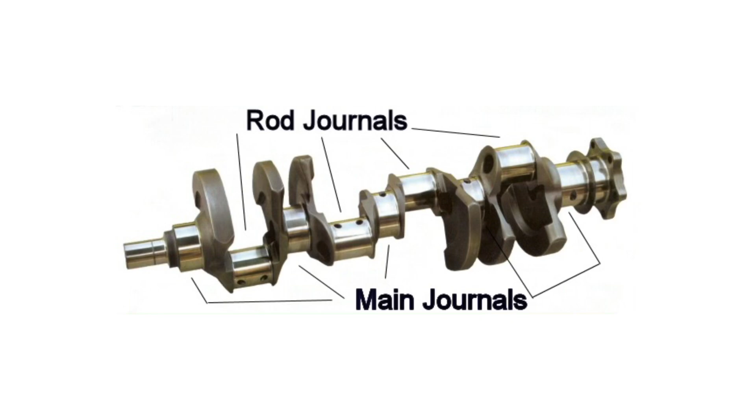The crankshaft journal is also called the crankpin or rod bearing journal. It is a mechanical device inside the engine which connects the crankshaft to the connecting rods for each cylinder. To look at it a different way, the crankshaft is the name given to the whole shaft, and the rod bearing journal is the point where the connecting rod connects to the crankshaft.

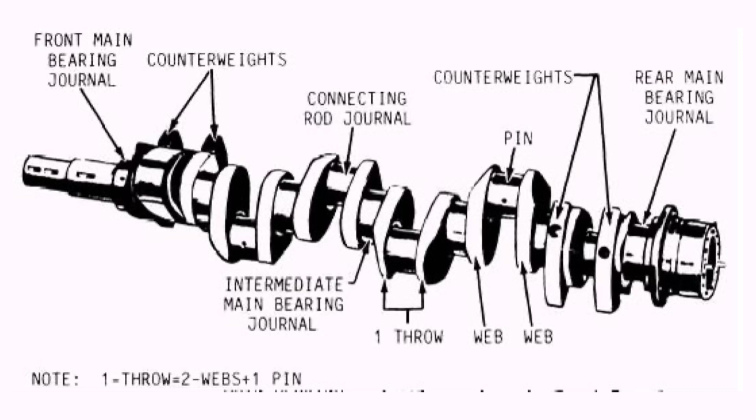In this episode, we are only covering the large journal engines and the 389 SD. All of the small and mid-range journals are covered in a separate video, which came out yesterday, which I'll link right here, and I'll also put the link in the description.

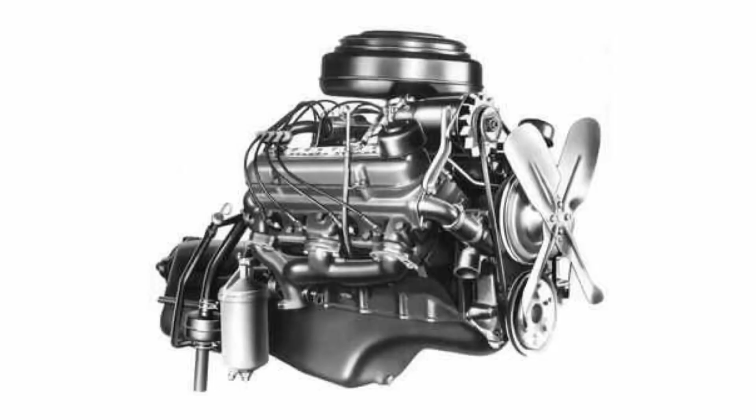As a little bit of a refresher, Pontiac's V8 was ready by 1953, but Buick and Chevrolet would complain to the corporate heads of General Motors to let Buick offer theirs first and put a 2-year hold on Pontiac so Chevy had enough time to develop a V8 of their very own.

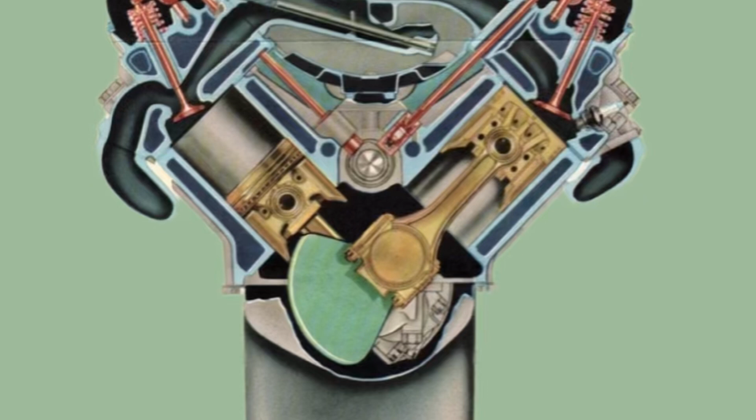The Pontiac V8 was a stout block design, to say the least, and it didn't follow the big block, small block mold that a lot of General Motors engines did. There was only one block size that went from 265 all the way up to 455 cubic inch displacement.

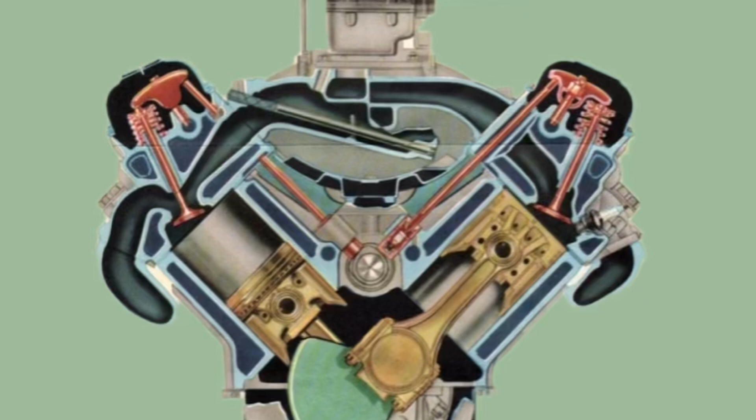Overhead valve arrangement features rocker arms on ball pivots on studs set inside the cylinder head instead of using a separate rocker shaft. The cam inside the engine would actuate a lifter, most of them hydraulic, but there were some mechanical lifters used in this engine series, which would actuate the push rod. Valves would open and close on the pivot action of the rocker arms.

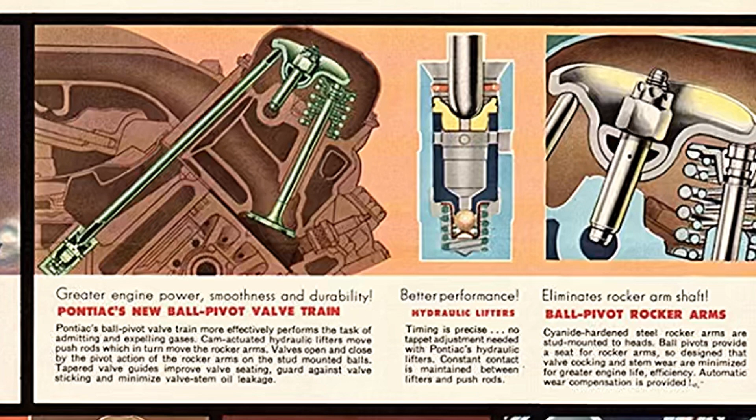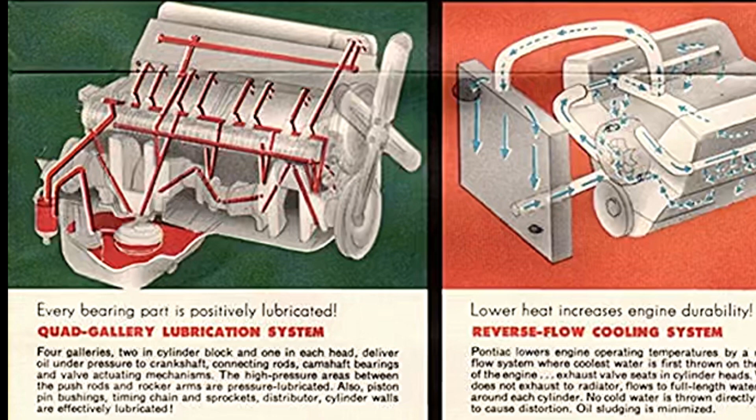This engine series uses a full pressurized oil and lubrication system, shooting a steady stream of oil to all of the critical components inside the engine from 4 oil galleries, 2 inside the cylinder block and 1 in each of the cylinder heads. Super Duty was Pontiac's super high performance engine program, and we have to talk about a character in history that goes by the name of Henry Yunick, but best known as Smokey Yunick.

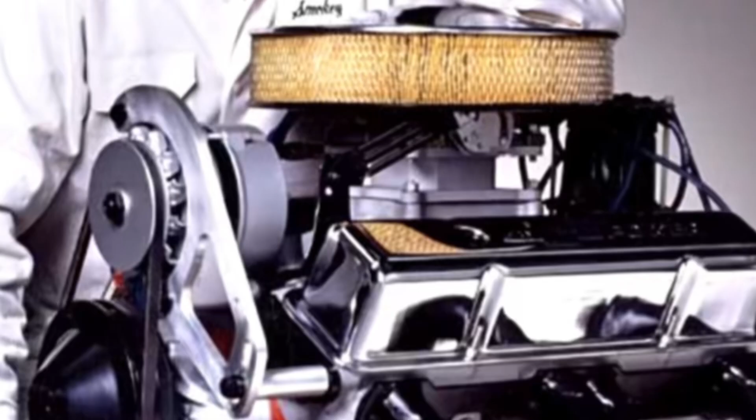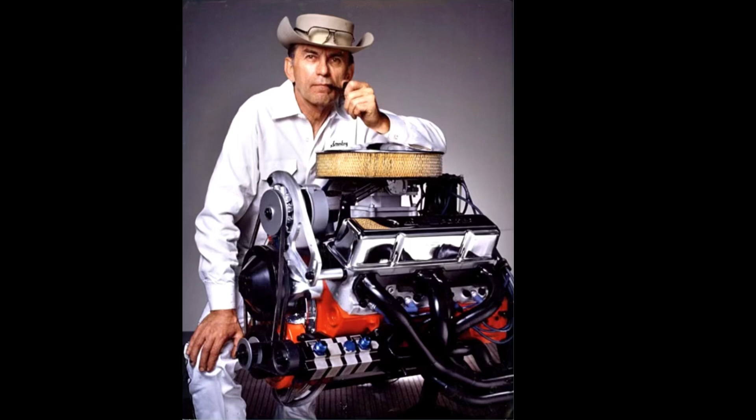In life, you meet people and you meet characters. Smokey was a character. His trademark look was the white uniform with the battered cowboy hat with a cigar or corncob pipe. He got his start in NASCAR, which was the National Association for Stock Car Auto Racing.

Yunick would get in with a local stock car racing team owner, Marshall Teague. Yes, that Marshall Teague. Yunick was a good mechanic, but he didn't have any experience with stock car racing until joining Teague's team. Yunick would tune the Hudson Hornet, which is what Marshall Teague raced, using a 308 cubic inch displacement flathead 6. The race engines were called the 7X, and they sound nothing like any other 6-cylinder you've ever heard before.

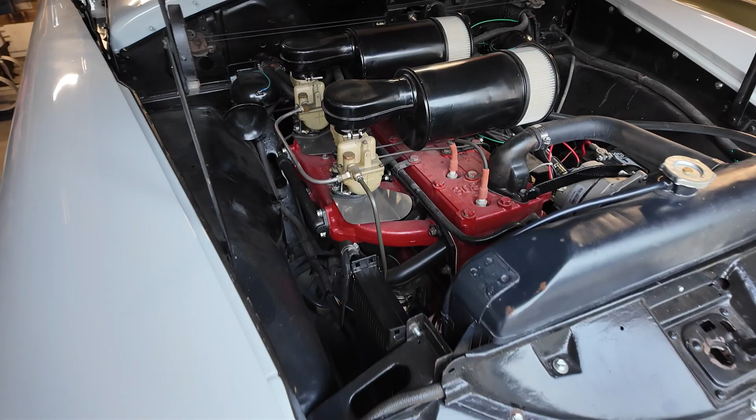Take a listen to this one. Anyway, with Yunick's help, they were able to win the Southern 500.

From the years of 1958 through 1973, Yunick would be involved with the Indianapolis 500. Yunick would evolve into one of the best car engine and car innovators, as well as interpreter of the rules in the sport of NASCAR.

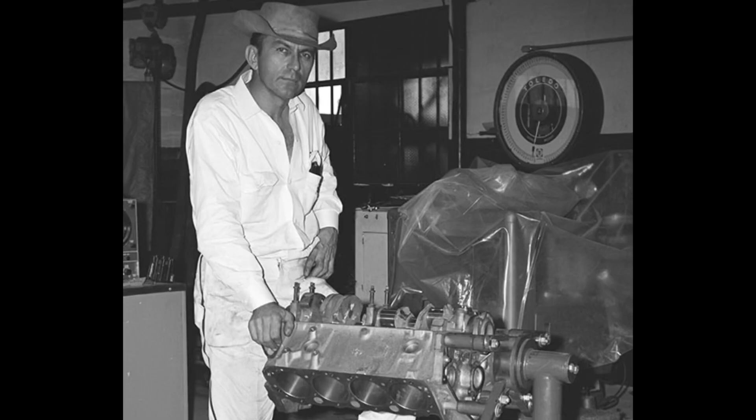Yunick would work with many different automotive brands during his time in NASCAR: Hudson, Chevy, Ford. Yunick would join Pontiac's racing division in 1959, and he was the force behind the Pontiac Super Duty engine program.

The SD engines had upgraded internals to go racing with, whether that was on the drag strip or making a left-hand turn on the oval track. These were the cream of the crop, chef's kiss, that Pontiac offered. SD versions came in 389, 421, and 455.

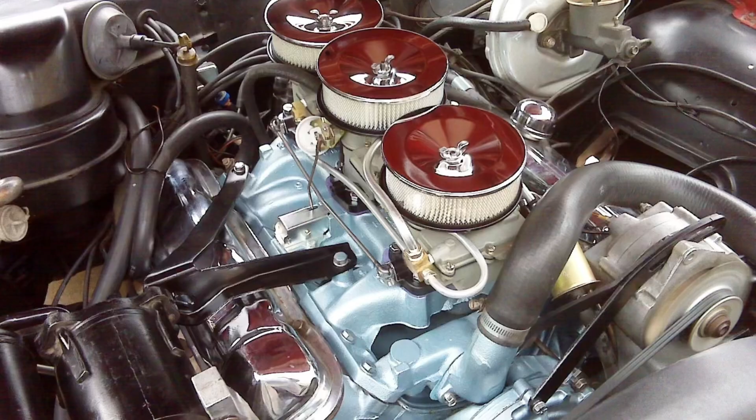The 389 got a Super Duty package in 1960, and it was offered until 1962. It got internal upgrades such as, but not limited to, 4-bolt main bearing caps, forged steel crankshaft, and forged connecting rods. There was another 389 engine option known as the 420A, Tempest 389, offered from 1959 through 1962, which produced up to 348 horsepower with 3 two-barrel carburetors, better known as tri-power.

The Super Duty version of the 421 was available as a secret menu option on the full-size Pontiacs from late 1961 through 63. Sources conflict on when the standard 421 was available, either in 63 or 64, but both the Super Duty version and the standard version were offered until 1966.

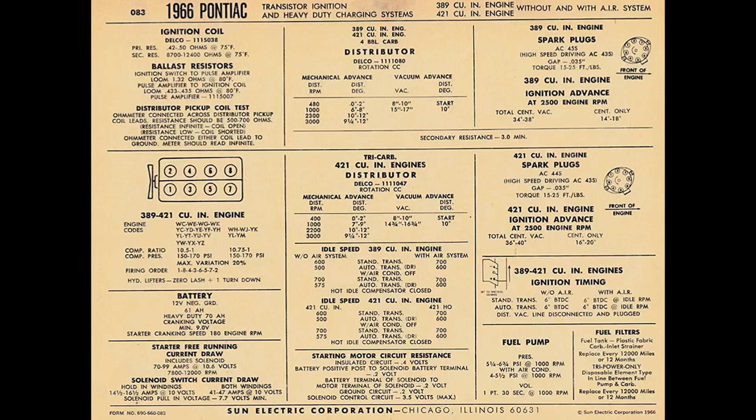The 421 V8 was cast differently than all of the other previous blocks, using a thinner wall casting, making the engine lighter in the process. Water ports going from the head to the intake manifolds were slightly changed, so the 1961 and later manifolds will not work on earlier engines and vice versa.

So, what set the Super Duty apart from the standard 421 included but not limited to: the camshaft was a McKellar number 10 with 308/320 degrees of duration. They were using solid lifters. The standard 421 used hydraulic lifters. Forged steel connecting rods, forged aluminum Mickey Thompson pistons, forged steel crankshaft, high pressure heavy duty oil pump with larger 8-quart oil sump, as well as 4-bolt main bearing caps.

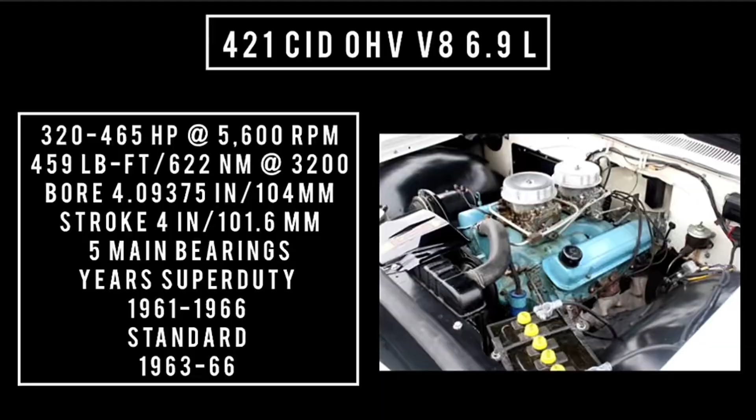421 cubic inch displacement overhead valve V8, 6.9 liters. The standard version made anywhere between 320 to 356 horsepower, around 4,800 RPM. But the Super Duty version could make anywhere between 353 all the way up to 405 horsepower, which some still say is even a conservative number.

Many believe that it can make up to 465 horsepower at 5,600 RPM, 459 pound-feet, or 622 Newton meters at 3,200 RPM, with a bore of 4.09375 inches and a stroke of 4 inches. Compression could be anywhere between 10.75 all the way up to 12. The standard engine was only available from 1963 through 1966, whereas the Super Duty was available from 61 through 66.

It's also important to note that there was an experimental Pontiac overhead cam 421 V8 made by McKellar, which will get its own episode one day.

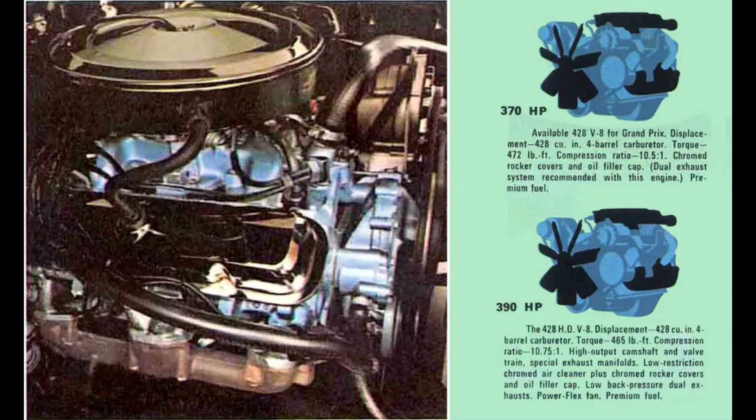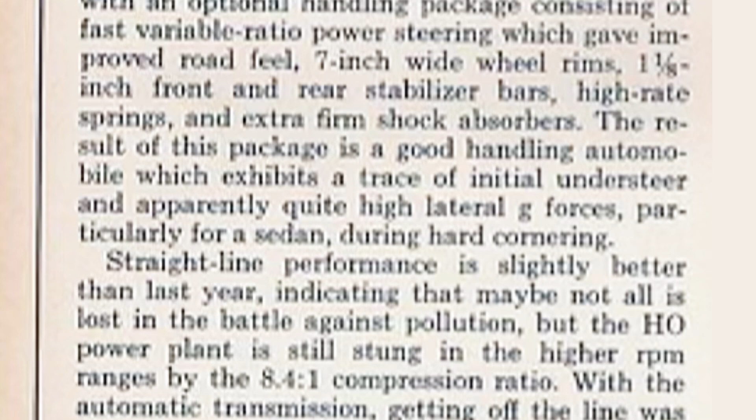In 1970, Pontiac would bore the 428 to 4.15 inches, and they would also increase the stroke to 4.21 inches, bringing overall displacement to 455 cubic inches, making this the largest displacement engine in Pontiac's V8 engine family. It was offered in standard, high output, and Super Duty. 455 cubic inch displacement overhead valve V8, 7.4 liters.

It's good for anywhere between 200 to 335 horsepower at 4,000 RPM, and those numbers might sound kind of small considering how big this engine is, but you have to remember, those are more than likely net horsepower figures. In the early 70s, we went from gross horsepower, or horsepower with absolutely no accessories attached that rob horsepower, best world figures, to more net horsepower with all of the power robbing accessories attached to the engine.

It could make up to 500 pound-feet or 678 Newton meters at 3,600 RPM, with a bore of 4.15 inches and a stroke of 4.21 inches. Compression was 8.2 to 1. This engine was used from 1970 through 1976. The HO, or high output versions, got different heads and a reinforced block. The SD 455 or Super Duty version was only available from 1973 through 1974. Emissions would ultimately kill this engine for the 1975 model year.

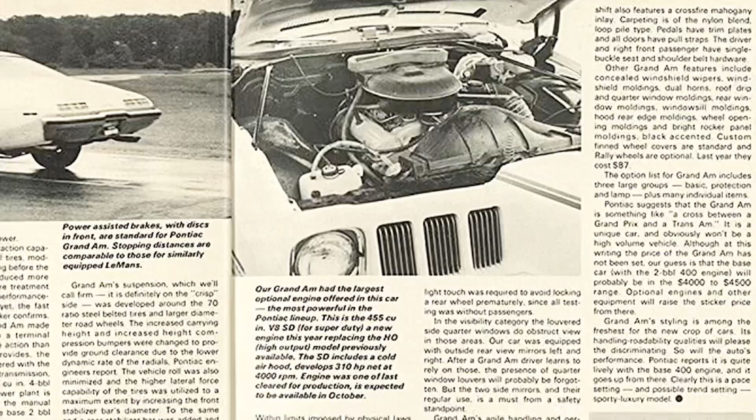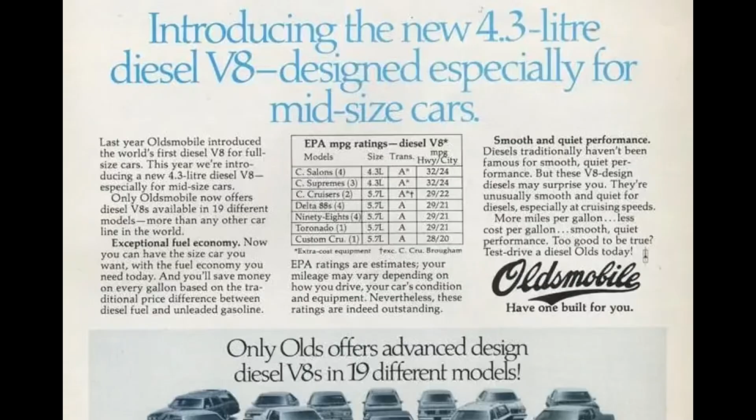Cylinder block was strengthened with 4-bolt main bearing caps, nodular iron crankshaft, forged connecting rods, forged aluminum pistons, high flow cylinder head. The camshaft had 301/313 degrees of duration. The 455 would ultimately be discontinued for the 1977 model year because of emissions. They would move on to produce more efficient engines, but Pontiac would cancel their V8 engine line entirely after the year 1981, and they would just use V8s from other General Motors branches.

All right, now it's time for Would You Rather. 2 scenarios today. Which one of these would you rather have? Late model year 1961 Pontiac Catalina with the 421 SD, or 1964 Pontiac Grand Prix with the 421 SD, or 1968 Pontiac Bonneville with the 428. I'm going to leave this here for a minute. If you need more time, feel free, pause the video.

On to the second scenario. 1971 Pontiac Firebird Trans Am high output 455, or 1967 Pontiac Catalina 421 Super Duty, or 1970 Pontiac GTO Judge with the 455 in it. I'm going to leave this here for a minute. If you need more time, feel free, pause the video.